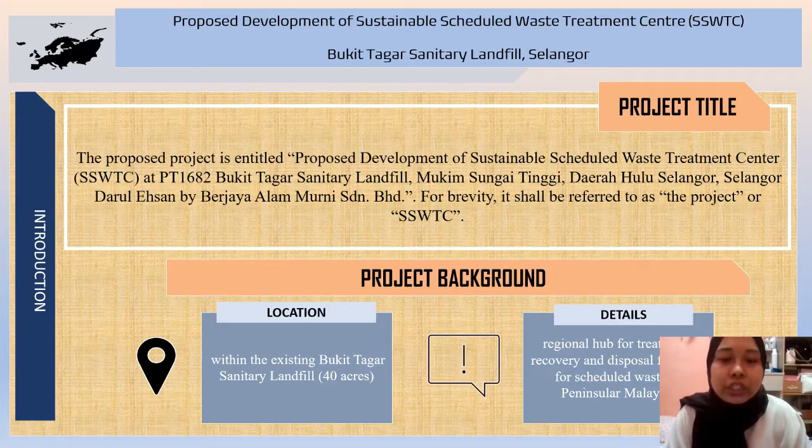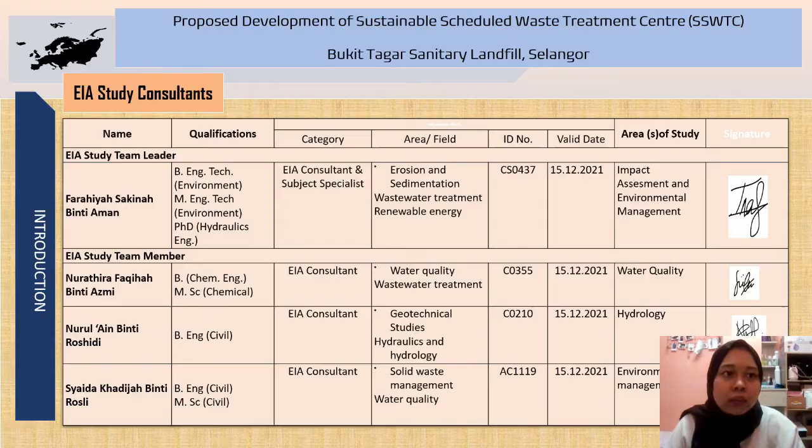I will present the statement of need for the proposed development of Sustainable Scheduled Waste Treatment Center SSWTC. So the statement of need consists of 5 aspects, which are job opportunities, economic development, safe environment, new technology, and also treatment services. First, job opportunities: the proposed project will offer a lot of job opportunities to the community. Next is economic development. Waste converted to new resources correlates with the objective of the development of SSWTC. The new resource can act as raw material for industry, so that's why it can enhance the economy of the country.

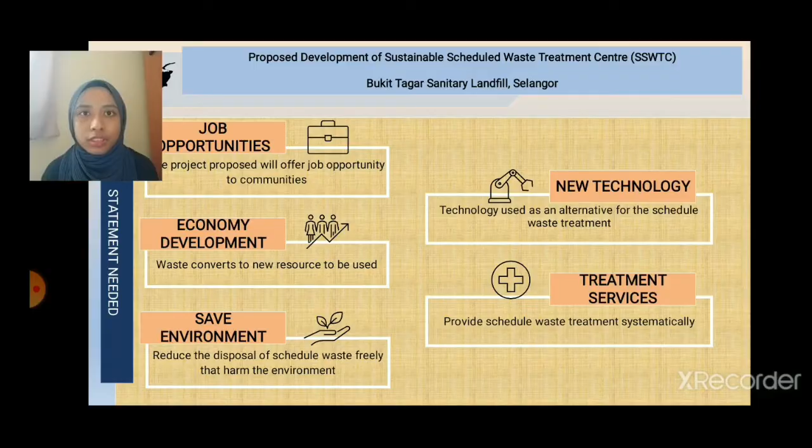Next is safe environment. Usually, some will dispose the scheduled waste into the river freely. So the development of SSWTC can reduce the free disposal of scheduled waste that can harm the environment. Next is new technology, used as an alternative for scheduled waste treatment. Next is treatment services: it can provide the treatment of scheduled waste systematically with the assistance of the new technology. For the project concept, it is to perceive the shortage of scheduled waste treatment and disposal facilities in Malaysia, and second, to develop the SSWTC to fill the gap, catering the need to have such facilities strategically located within the country.

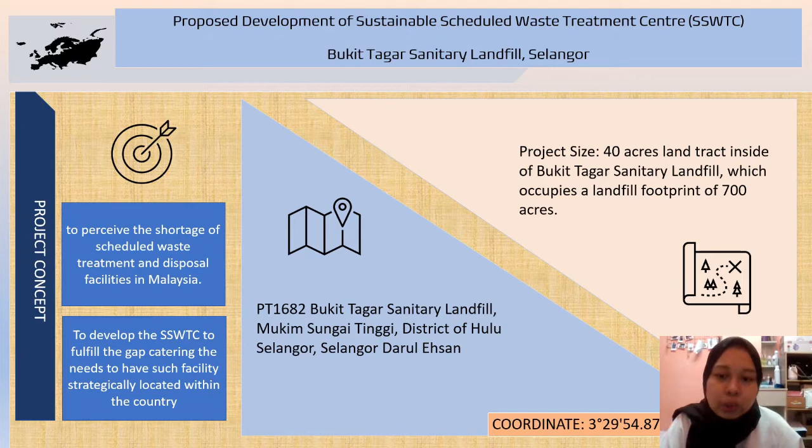Okay, we already know the project. Where is the project? It is inside Bukit Tagar Sanitary Landfill, and the project size is a 40 acre land tract inside Bukit Tagar Sanitary Landfill, which occupies a landfill footprint of 700 acres. We also provide the coordinates of latitude and longitude below there. Okay.

Next is construction activities. There are 7 types of facilities. The first is the WTE thermal treatment plant. The capacity is 20,000 TPA. The description is thermal treatment decreases the volume and mass of waste and inerts toxic components. At the same time, it produces thermal and/or electrical energy and reduces the release of pollutants to air and water.

At present, Bukit Tagar Sanitary Landfill captures and harvests methane gas produced by horizontal wells from the first and second cells. Only some part of the methane gas is collected and converted into energy, while the remaining gas is being flared. Electricity produced from the site is sold to Tenaga Nasional Berhad, which is a utility corporation in Malaysia, via the feed-in mechanism.

Second is the secure landfill. The capacity is 350,000 cubic meters of airspace. This is for the final disposal of stabilized waste. No further use is needed before being permanently buried below the soil surface. And the waste acceptance criteria, WAC, guideline is the best possible methodology to determine whether the waste material characteristics can be disposed in a secure landfill or not.

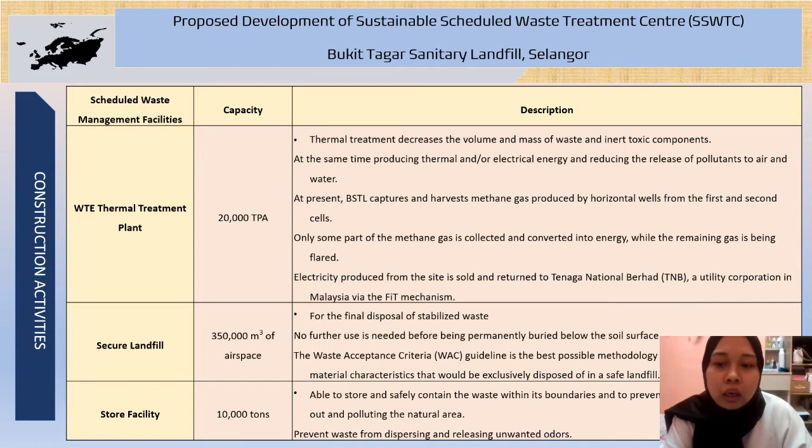Fifth is solidification facilities. The capacity is about 8,000 TPA. The treatment of contaminated waste for recycling and remediation of polluted land.

Next is oil recovery facilities. It's involved with the Environmental Quality (Scheduled Wastes) Regulations 2005. For waste oil that does have economic value, waste oil recovery facilities approved by the Department of the Environment can be retrieved.

Second last is leachate treatment plant. 150 meter cube per day must comply with the DOE, and it rapidly collects and channels the leachate produced from the landfill waste layer to the leachate treatment facility.

And lastly, surface water treatment plant SWTP. The capacity is 250 meter cube per day. Design disinfection, monitoring vital treatment parameters and reporting records of operation.

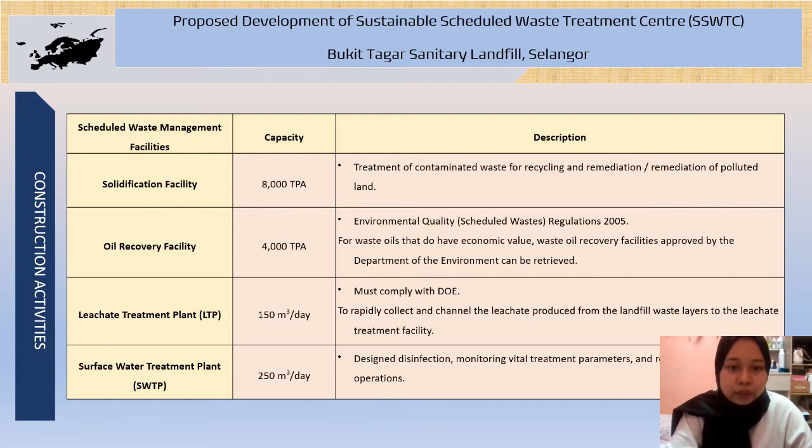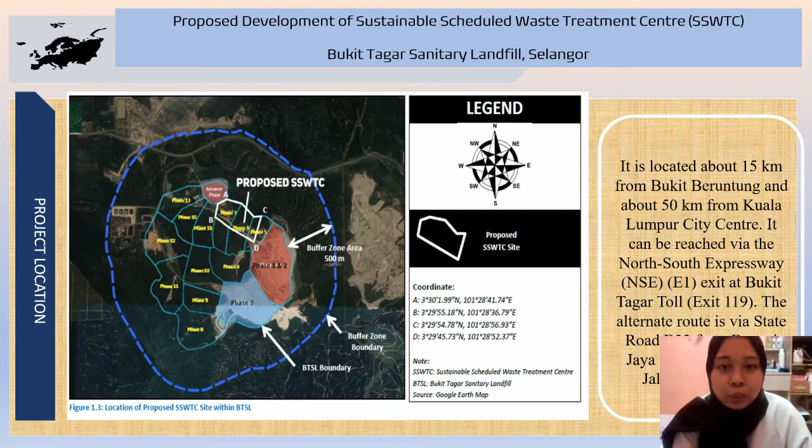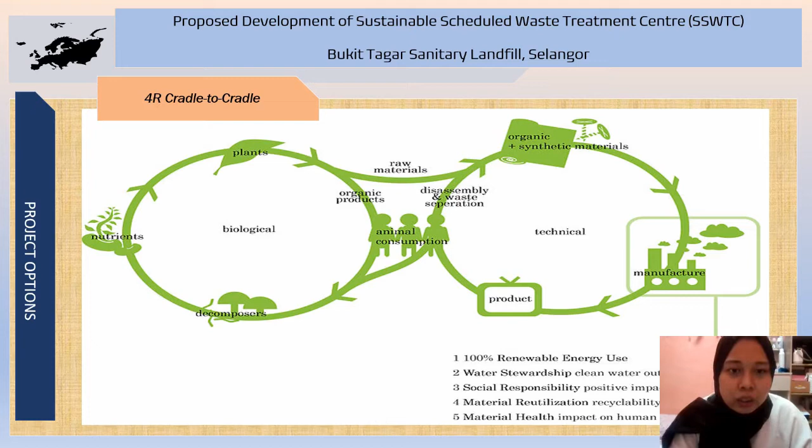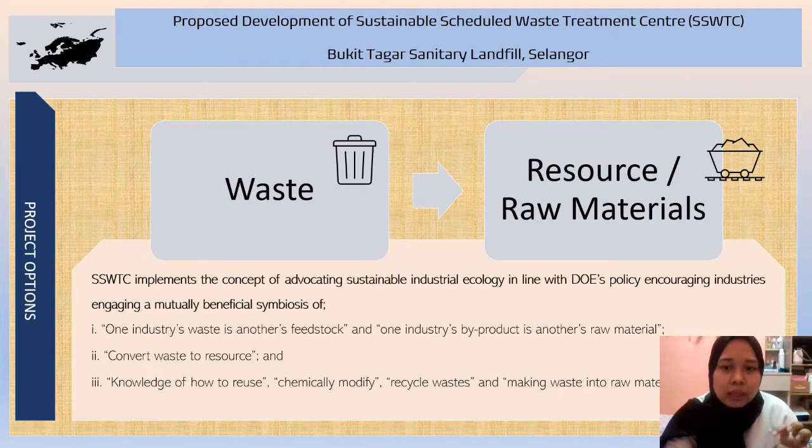Okay, the project option is 4R cradle to cradle. You can see here, it's going to be waste and then to the resource or raw materials. SSWTC implements the concept of advocating sustainable industrial ecology in line with DOE policies, encouraging industry engaging in a mutually beneficial symbiosis, making waste into the resource raw materials.

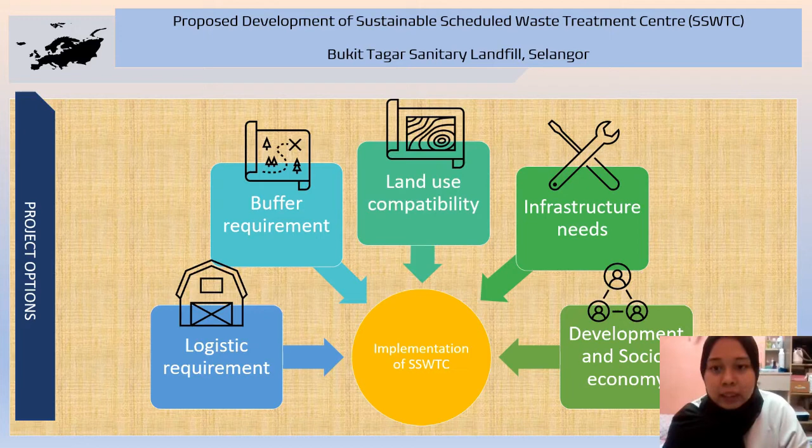This is the implementation of SSWTC. Okay, first is logistic requirement, buffer requirement, land use compatibility, infrastructure needs, development, and socio-economy. So the objective of this site option is to maximize the public acceptability, minimize the health effect towards the workers and the residents near the sanitary landfill, minimize the costs, and also minimize the environmental impact.

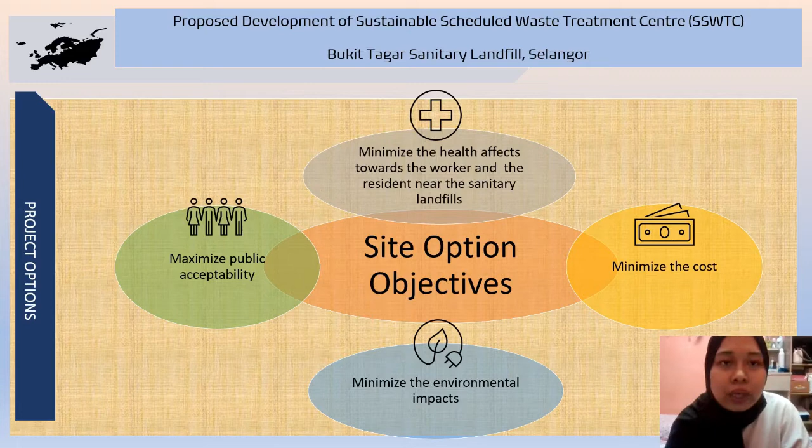Okay, the technology option is combustion, gasification, pyrolysis, plasma, and lastly co-combustion.

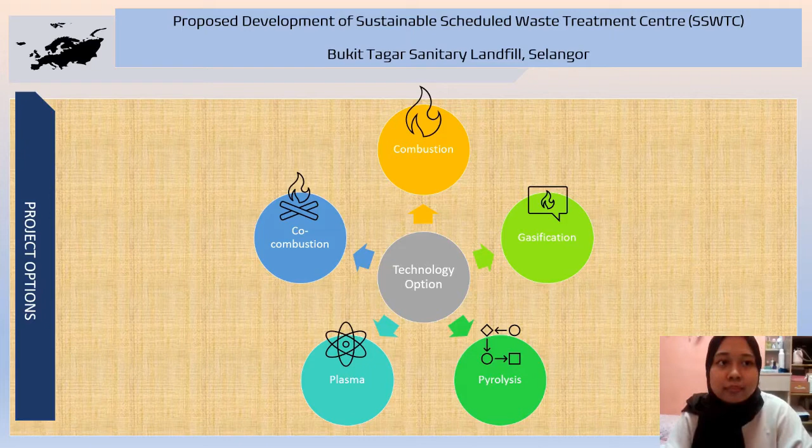Assalamualaikum warahmatullahi wabarakatuh. My name is Farahiyah Sakinah binti Aman and I will explain about the sampling and current environment condition of the Bukit Tagar Sanitary Landfill, Selangor. So the location is within 5 km radius from the proposed project, and sensitive receptors located within the ZOI are identified and reported within a 5 km radius map.

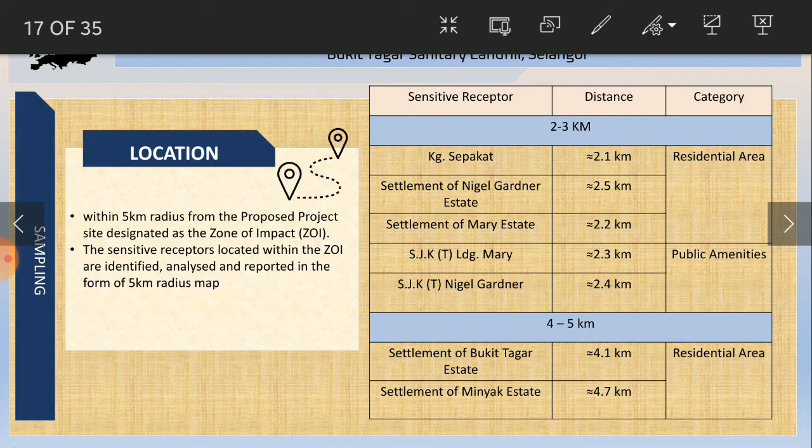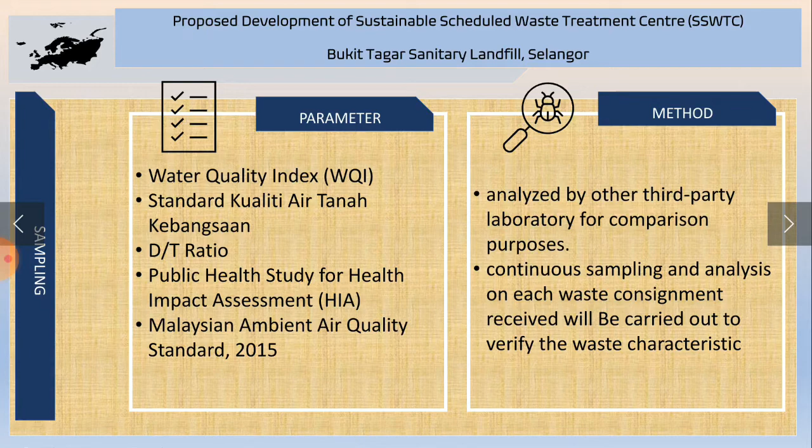And for the current environment condition, the climate of Bukit Tagar is within 24.8 till 33.1 degrees C. Wind speed with maximum 11 and minimum 5.5 kmph. Rainfall average of 2945.42 mm. And humidity within 75.9 till 77.7%.

As for the geological structure of Bukit Tagar, it is characterized by alluvium deposit from the river and the sea and pre-quarantine rock foundations as mentioned in the slide. And the rock is folded and tends to be 20 till 45 degree with particle size 2 till 0.06 mm, and up to 0.004 mm if it contains mud. And odor quality is measured at all stations and classified as natural and acceptable, where the DT detected is below 2.0, under slightly noticeable.

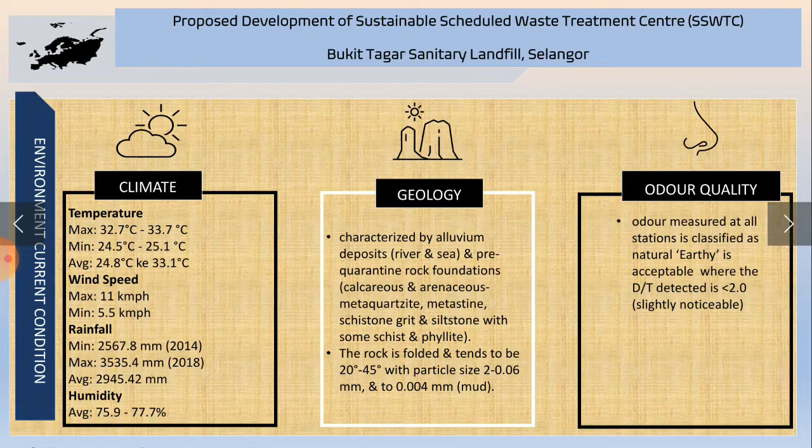The hydrogeology study within 5 km radius is characterized by unconsolidated deposit which is composed of 4 elements: sand, clay and silt; humic clay and silt; clay; silt, sand and gravel. Rock types in this formation comprise low-grade metamorphic rocks such as metasandstone, slate and phyllite.

As for the river system, Bukit Tagar is within the Sungai Nyamuk Basin with area 1529 ha, and the project site will be platformed and surface runoff is channeled to the sedimentation pond located at the southwest of the SSWTC boundary within the BTSL before being discharged into Sungai Nyamuk.

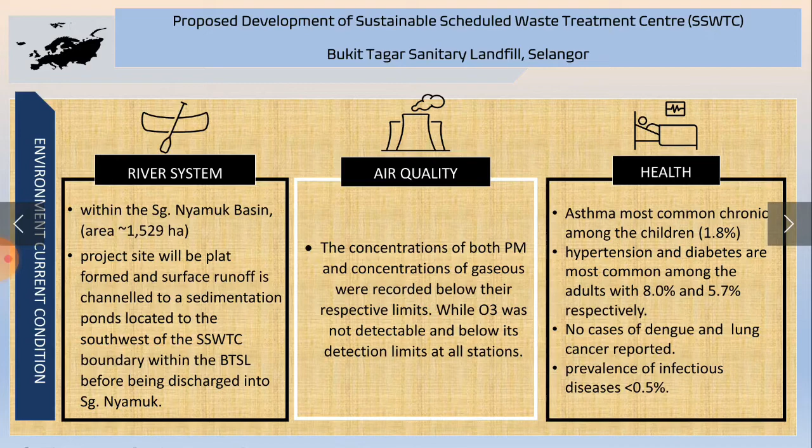For the air quality, concentrations of PM are recorded, and they are below the respective limit. For the health of the villagers, asthma is a common chronic condition among the children, while hypertension and diabetes are common among adults, and no cases of dengue or lung cancer were reported, and the prevalence of infectious diseases is below 0.5%.

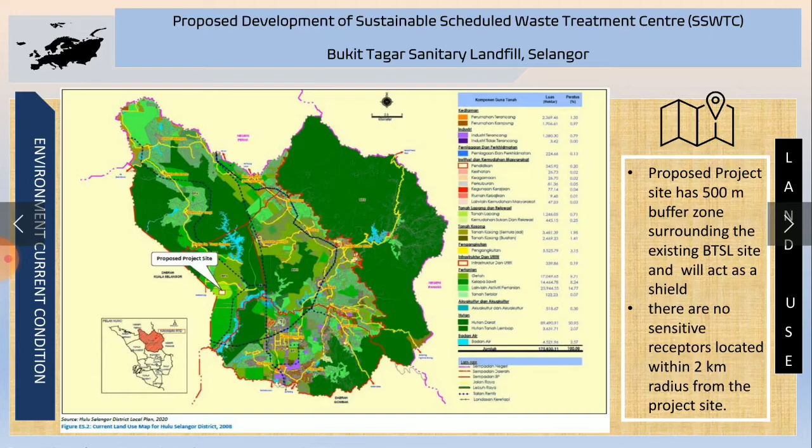So the proposed project actually has a 500-meter buffer zone surrounding the BTSL site, so it will act as a barrier. So if anything happens, it is safe because it has a distance of 500 meters, and from the study, there is no sensitive receptor located within a 2 km radius from the project.

Okay, so as for the water quality, the downstream area, which is W3, Sungai Ayer Hitam, and already receives acid peat drainage and also pollutant load. And Sungai Selangor itself usually receives cumulative pollutant loads from the upper Sungai Selangor basin. As for the groundwater, the compliance monitoring for groundwater follows the standard as stipulated for industrial purposes.

As for the noise quality, N2 is lower than the permissible sound level, which is 70 at day and 60 at night, which is the noise level at the village area, while N1 is higher than the permissible sound level, which is 65 at day and 55 at night.

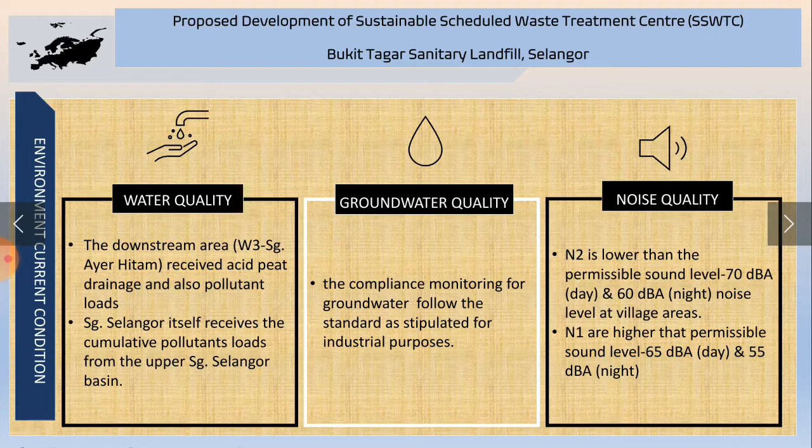Okay, next I will present the potential significant impacts of the development of SSWTC. So first, for the air quality, during the construction phase, dust can be produced from the exhaust of vehicles entering and exiting the site. For the operation phase of SSWTC, the air quality is lessened due to the release of fly ash, toxic heavy metals, and also dioxin from the stack of the thermal treatment plant.

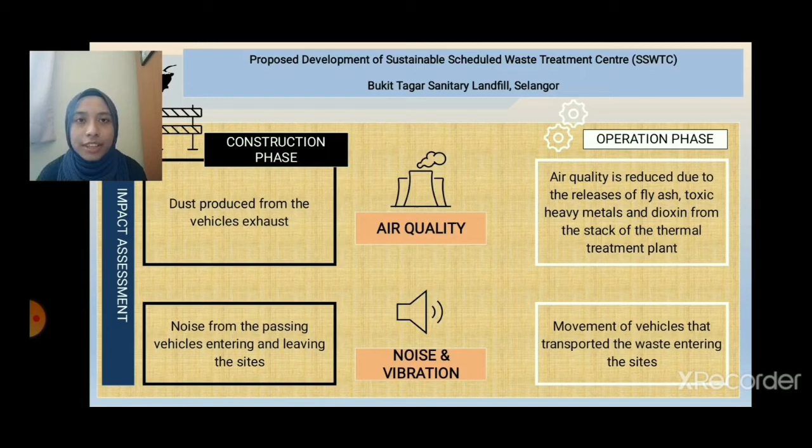Next, for the noise and vibration, for the construction phase and also operation phase, noise from the passing vehicles entering and leaving the site is the impact of the scheduled waste treatment center. Next is the community health. The effect on community health near the project site, because of the poor air quality and noise during the construction phase, is an impact of the scheduled waste treatment center.

Next, during the operation phase, the effect on community health is also one of the impacts because of the prolonged exposure to the poor air quality. Next is waste management. Solid waste is produced from the construction activities during the construction of the scheduled waste treatment center. While for the operation phase, fly ash generated from the treatment plant is also an impact of the development of the sustainable scheduled waste treatment center.

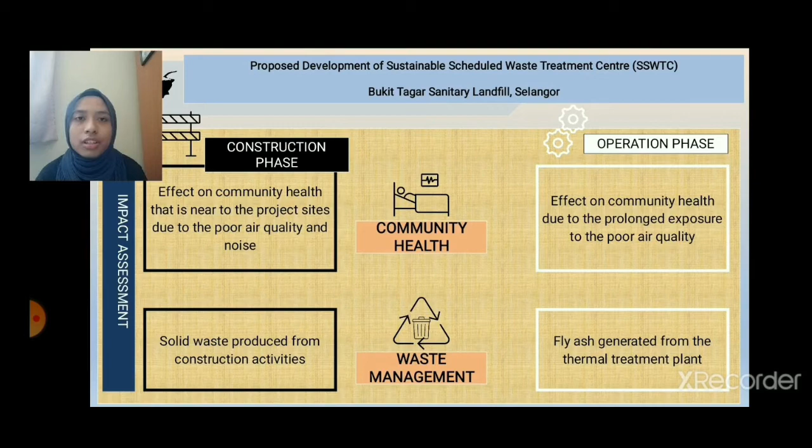Next is the water quality. Surface runoff at the site during the construction phase can transport the construction waste, which can harm the river water. Next, the wastewater discharge from the leachate treatment plant during the operation phase is also one of the impacts, because the wastewater discharge can harm the river. This is wastewater quality.

For the construction phase, wastewater quality has a small impact, while for the operation phase, there are two impacts, which are leachate produced from the landfill and also overflow of leachate during heavy rain, and this is because the leachate can pollute the river water.

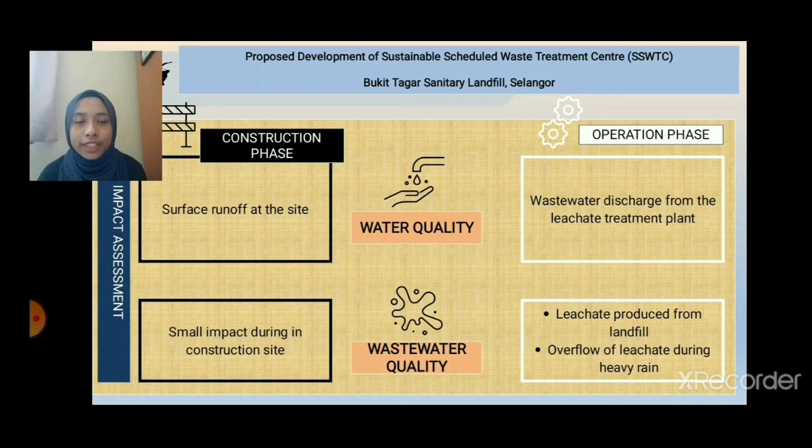Next is the methodologies for the impact assessment. It consists of three aspects, which are health impact, water quality, and also air quality. So for the health impact, the health risk assessment (HRA) incorporates the results of the cumulative air dispersion modeling, water modeling, odor, and also fugitive emission for all facilities for the health impact assessment (HIA).

Next, for the water quality, the model used is QUAL2K, to allocate the waste load and also to analyze the other contamination. And the QUAL2K framework includes the simulation of pH, total inorganic carbon, and also pathogens for the river water. Next, for air quality, an air dispersion model is used to analyze the air pollution dispersion from the proposed thermal treatment plant.

So the effect of particulates such as PM10 and also PM2.5 is measured for the air quality.

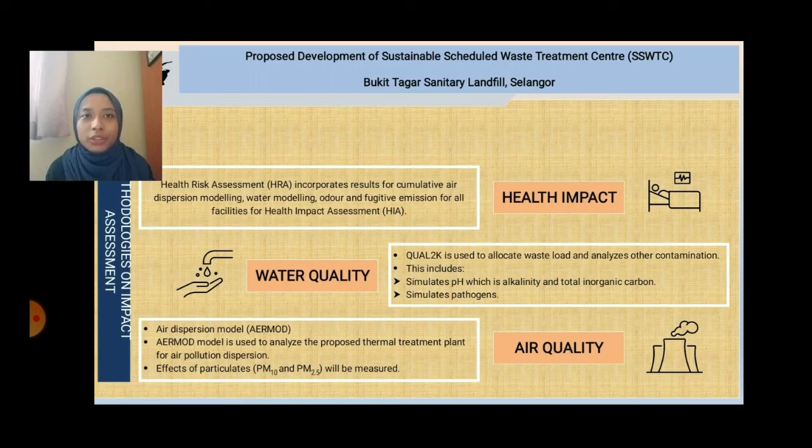Okay, first, for the air quality during the site clearing, for the construction phase, one should frequently service the transport vehicle to restrain exhaust air emission. Then, to ensure the ventilation of the storage of hazardous waste should be maintained. During the operation phase, one should wet down the roadways used to transport the waste to reduce the fugitive dust emission, and provide the workers with appropriate PPE such as masks.

For the noise and vibration quality for the construction work, during the construction phase, one should maintain the equipment and the machinery used to avoid any unnecessary noise. And during the operation phase, transportation or any activities will be operated at the daytime only to prevent any nuisance during the night time.

For the wastewater quality, for the wastewater management during the construction phase, one should not dispose any kind of oil used for vehicle or machineries on the ground or drain. And during the operation phase, one should design the leachate treatment plant to ensure the effluent release is allowable.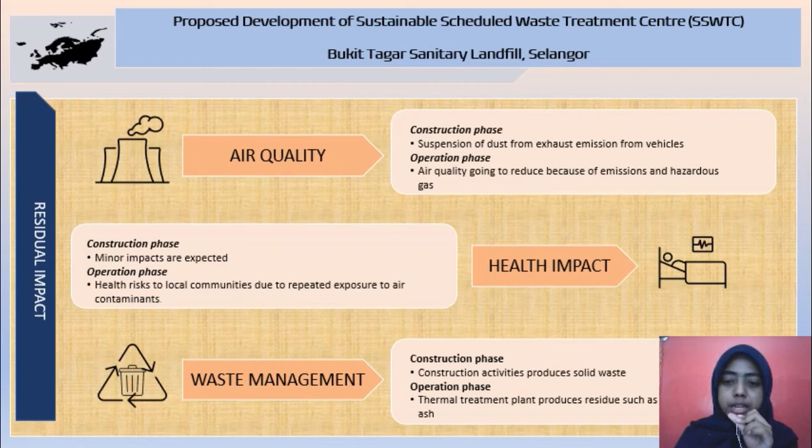While for the waste management during the construction phase, construction activities produce solid waste, and for the operation phase, the thermal treatment plant produce residues such as fly ash and bottom ash. For the... during the construction phase, site preparation including clearing the surface vegetation, which is excavation, will create a level ground surface, and during the operation phase, leachate will infiltrate into the surrounding through leakage in the proposed liner system.

For the wastewater quality, during the construction phase, no significant impact are expected, while for the operation phase, secure landfill activity will produce leachate. For the water quality, during the construction phase, minor impact are expected, but during the operation phase, leachate produce effluent discharge.

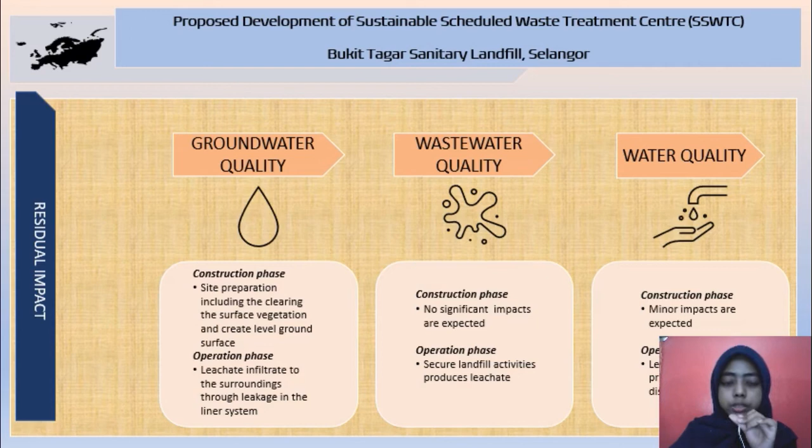Okay, lastly, for the environmental management plan, for the air quality, for the dust, one should monitor any activity that produce high amount of dust emission, especially when there is high wind. Then maintain the access road used for transport, such as damping with water. And lastly, limit the speed of vehicle to 30 km per hour.

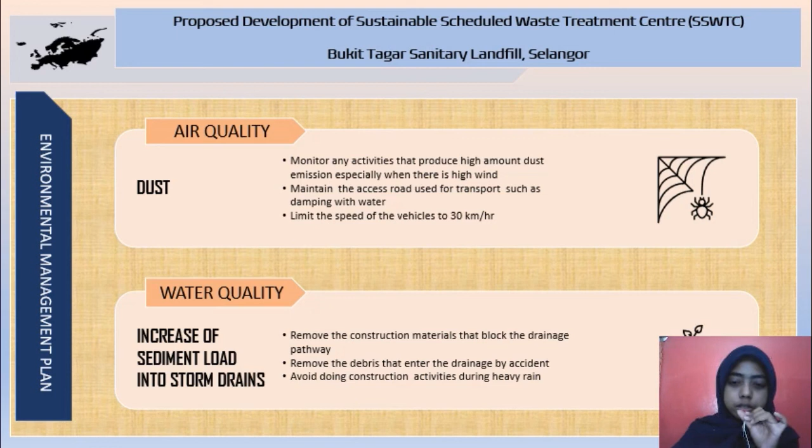Then for the water quality, for the increase of sediment load into storm drain, one should remove the construction material that block the drainage pathway, and then remove the debris that enter the drainage by accident. Then avoid construction activities during the heavy rain. Okay, for the waste management, for the construction waste and the scheduled waste, one should segregate all waste according to its type, and reuse, recycle or recover the waste if possible, and then prepare a solid waste management plan.

And lastly, for the noise quality, noise from the machinery, the worker should be provided with exhaust muffler when handling the engine power equipment. They should practice a good procedure and restrict any activities at night to avoid any nuisance.